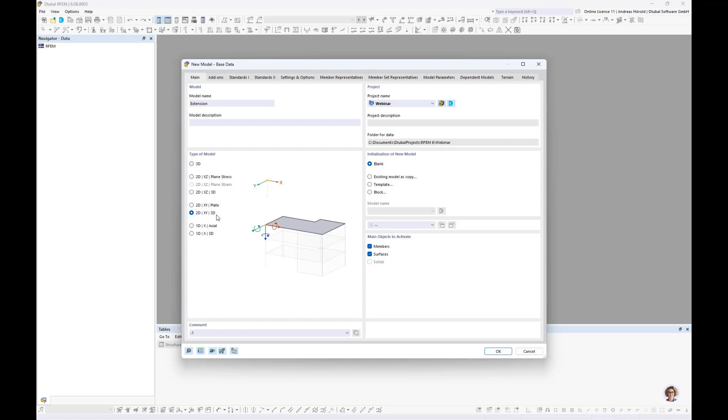So I start with a new model, right above, new model. We start with the first dialog. It's a similar dialog as in RFEM 5, but the user interface is very modern. I start with a model name. I call it extension. A new small feature: you can select a type of model, for example 2D XY, 3D. This allows you to put three-dimensional loads on the model, and the results can be 3D internal forces. Also for the 1D, that's this selection here. Okay, then we turn to the next dialog, the add-ons.

That's the next difference to RFEM 5. The add-ons are now directly integrated into the main programs. This allows the individual parts of the program to interact with each other. For example, with the building model, you can determine the floor masses for the dynamic analysis. Another example, you can do a 3D calculation with the building model and then design, for example, a concrete slab as 2D model, or timber slab, etc.

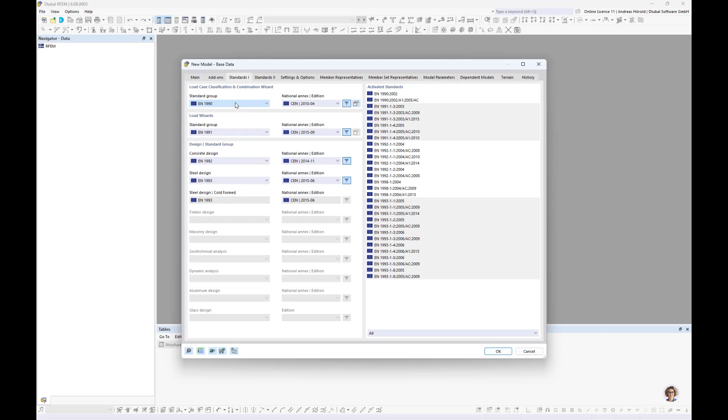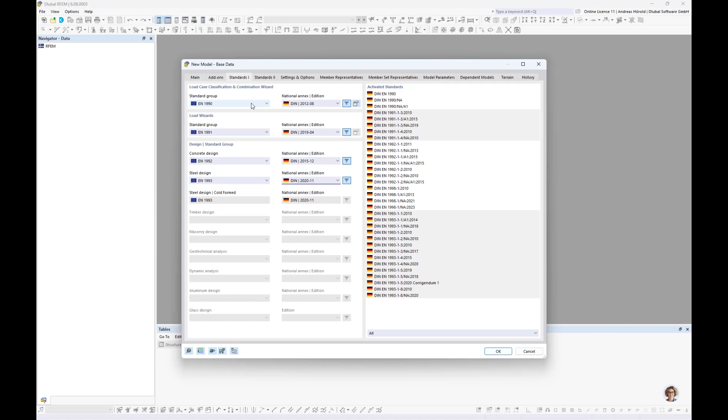Then the standards: as also in RFEM 5, you have a lot of international standards. We use the Eurocode and, in our case, the German National Annex for our example. We would like to use the combination wizard and also the load wizards. We selected that here above.

So then settings and options. That's also a quite new feature, the member representatives and the member set representatives. For members and member sets with the same properties, you can use representatives for model organization, design, and documentation. We will use that feature in our simple example for today, and you will see that it's very easy to handle, and it's also a big advantage.

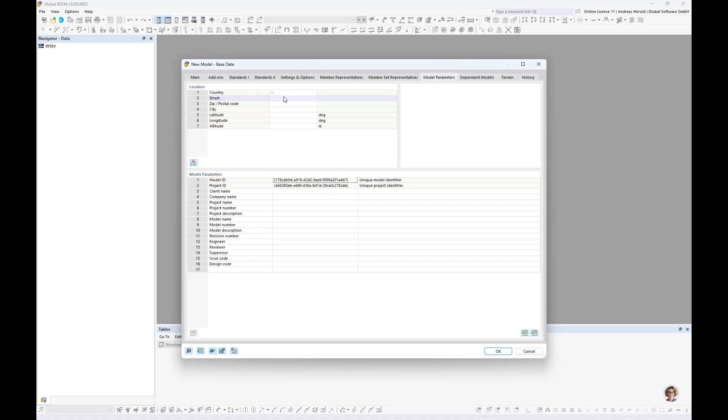So then that's the properties of the member representatives. You can change it. We will leave the settings, but it's also important to mention the model parameters. You can import the construction site for load determination. So we select a place or a location. We enter the location Leipzig, it's a subsidiary of our company.

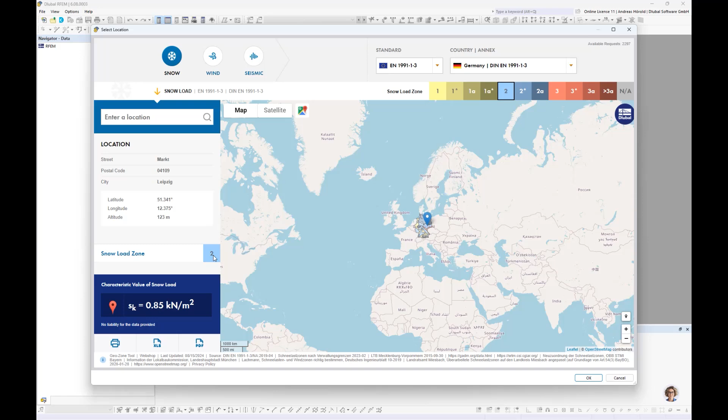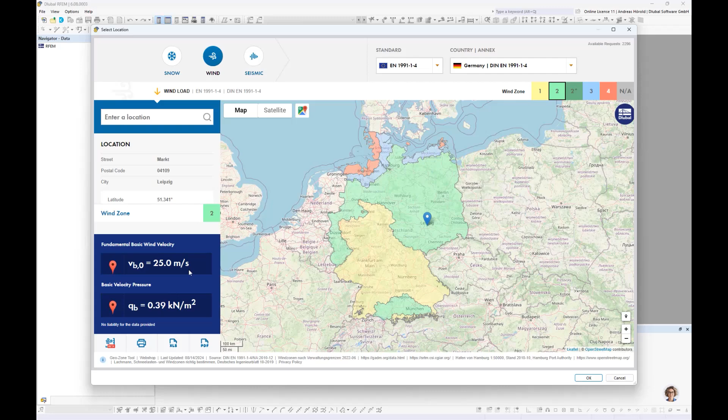So you can see the snow load zone, the wind zone, and the parameters and the values. And we can also see the seismic map, but we don't do any seismic design today. So we leave the dialog, and now the program imports all the values, and we can use the values later for the load wizards, for the snow load and for the wind load.

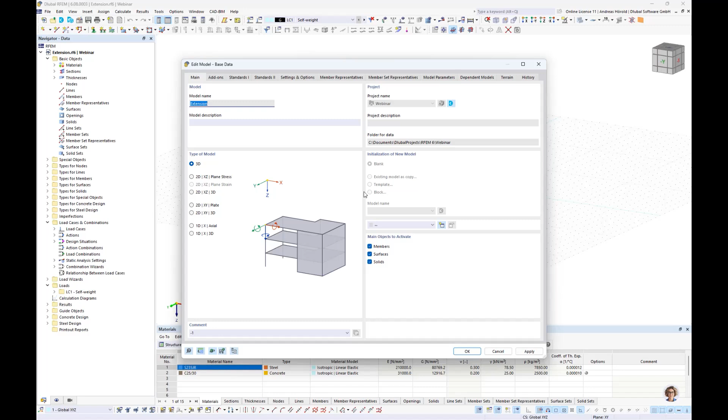So you can see that's Leipzig, the altitude, and so on. Okay, now we can leave the dialog. So that's now an empty window. And as I mentioned, with that button left above, edit model base data, you can return to the dialog anytime and select any add-on.

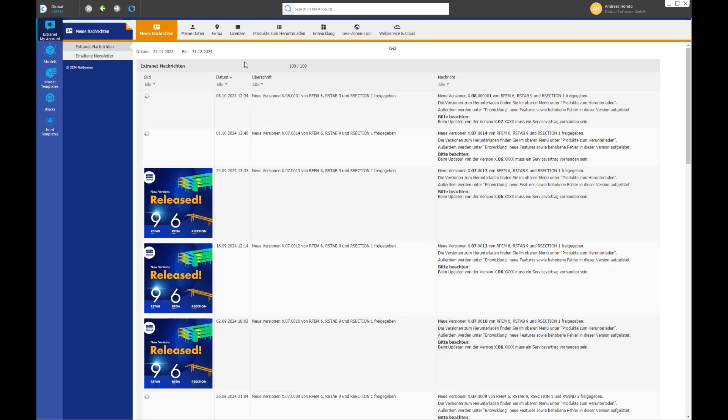So then the next difference, or what is new in RFEM 6, that's the Dlubal center left above. I click on it. You can see your folders. That's quite similar to the project manager in RFEM 5, but you can enter your Extranet account. So that's the news, for example. It's German for my account. Then you can save model templates.

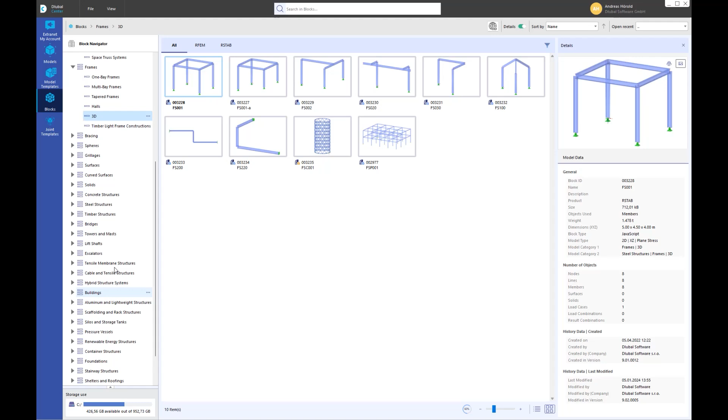The blocks are here. You can see a lot of blocks that also have parameters, not all, but a lot. And just use them. And there are also the joint templates for the add-on steel joints. Okay, we can leave the Dlubal center. Maybe just a hint, when you do, for example, a right click, that's my folder for today, the webinar folder. You can create a new project or new file and so on. So now we leave the Dlubal center.

And you can see what is similar to RFEM 5. Above the menu, on the left side, the navigator data, display, and views, and the tables are here. That's the same as in RFEM 5. There are already materials, sections, and thicknesses of the last project. I would like to delete all. With a right click on the basic objects, you can delete all basic objects. Okay. And now all is empty.

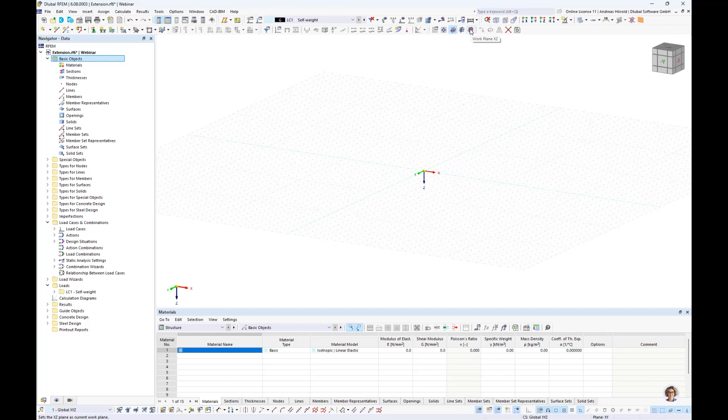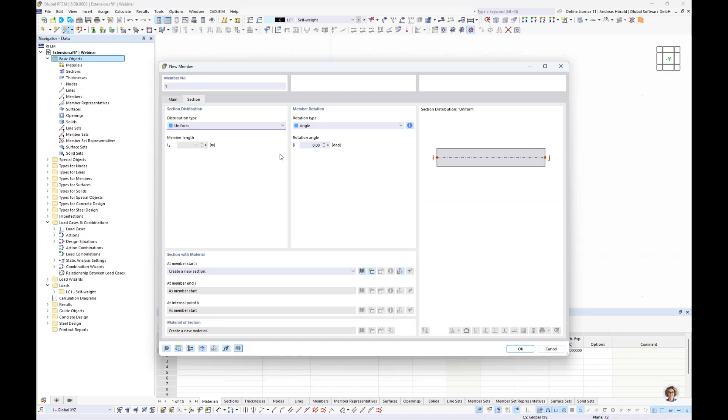So we start with the steel frame. I change the work plane to XZ above, and I view in minus Y direction. So then left above, we start with a new single member, the column. It should be a beam member type, and there are also other member types available as usual. So then section, I create a new section. You have got a large database, similar to RFEM 5. We have a lot more cross sections in our library.

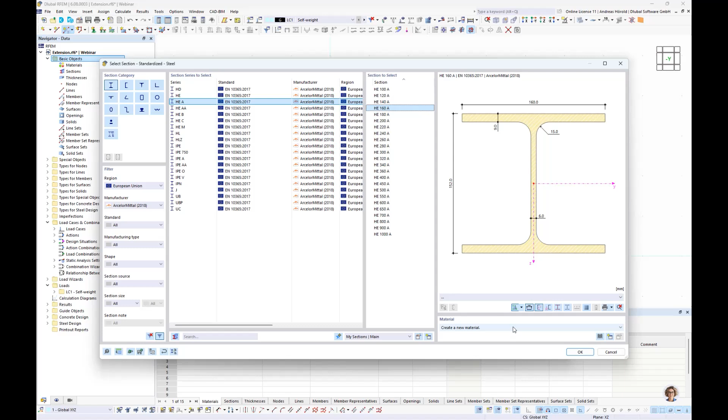So then, I use European Union and ArcelorMittal and an HEA 160, and I can create a new material also in this dialog. So then region, also European Union, material type steel, carbon steel. You can see a lot of steels, and I use steel S235JR. Okay, so we can leave the dialogs and enter the column. It should be 3 meters high.

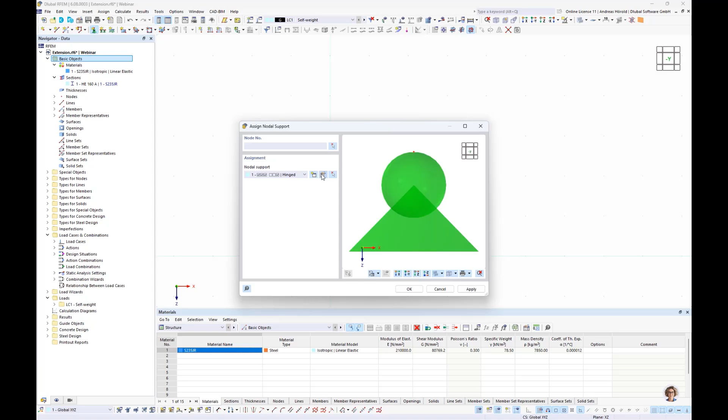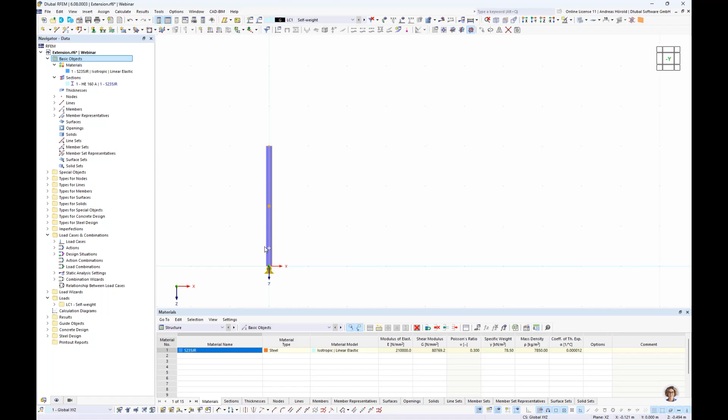Then I create a support, left above, nodal support. Now a hinged nodal support. Maybe I change the settings. No, that's quite good. We have got a hinged support. Okay. So now I copy that column 2 times. I select all, and then when I press the control key, you can see a plus. And that means that I will copy that column. So 5 meters and again 5 meters. Okay.

And when you press the shift key, you can see a minus. Then you will only move the object. So then you can see the green points, and that's the member representative number 1. And it contains all the 3 similar columns. And later we will design only 1 member representative. And then you will see the advantages.

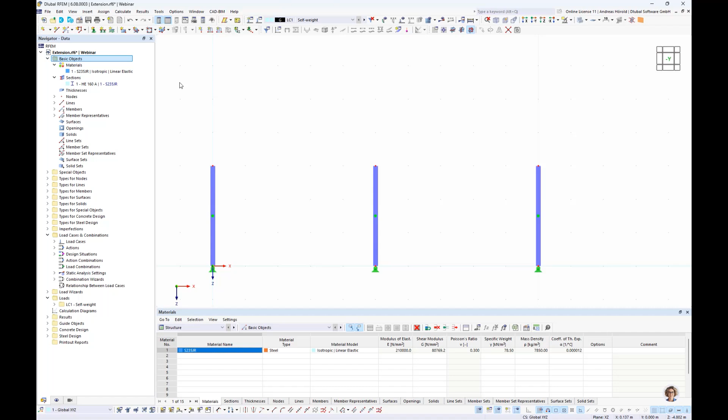So the horizontal beam is missing, left above, new single member. We use another section. We go in the library. It's a similar workflow as in RFEM 5. That's why I can go a little bit faster through the dialogs. Okay.

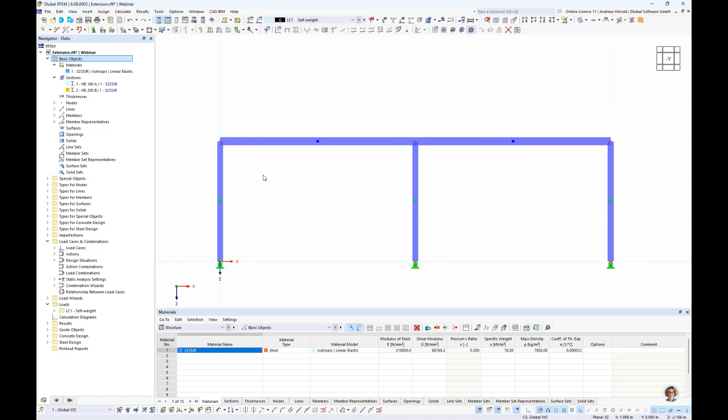So now you can see also here blue points. That's the member representative number 2, and it contains both horizontal beams. Okay, the steel construction is finished, and now we would like to model the concrete slab. We would like to enter it here in that area.

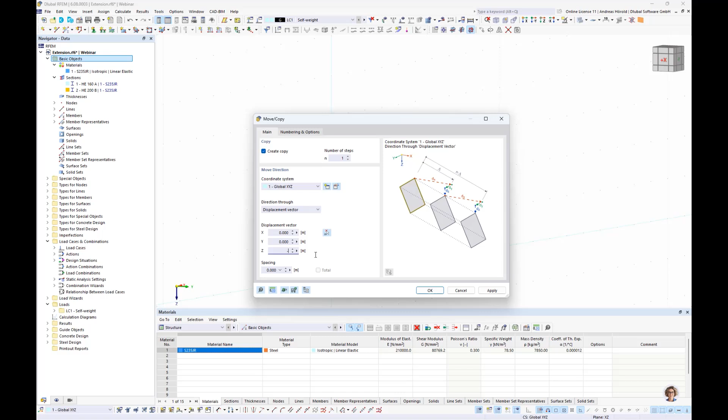You could enter it at the same height as the column height is, with an eccentricity, and use line releases or line hinges. That's still possible, but I would like to use a new feature, and that's also very good. That's the rigid link. So I copy that node right above, move, copy selected objects. I create a copy, minus 200 millimeters.

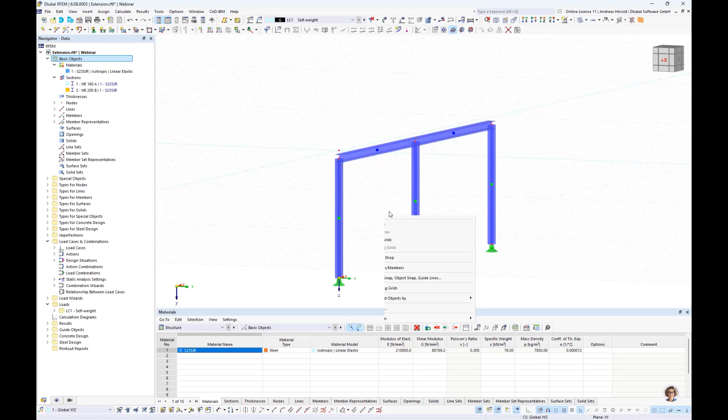Okay. Then I change the work plane above XY, and I set a new grid and work plane origin. So in that point, and you can see that's now my work plane. Okay, I view in Z direction, and now I enter left above the concrete slab. Stiffness type, standard, and I have to create a new thickness. The thickness should be 200.

We can easily calculate. The horizontal beam is 200 high, and the slab or the plate is 200 high. That's why I copied the node 200 millimeters. So we have to create a new material. European Union, concrete, and I use a concrete C25/30. Okay. So from this point to this point.

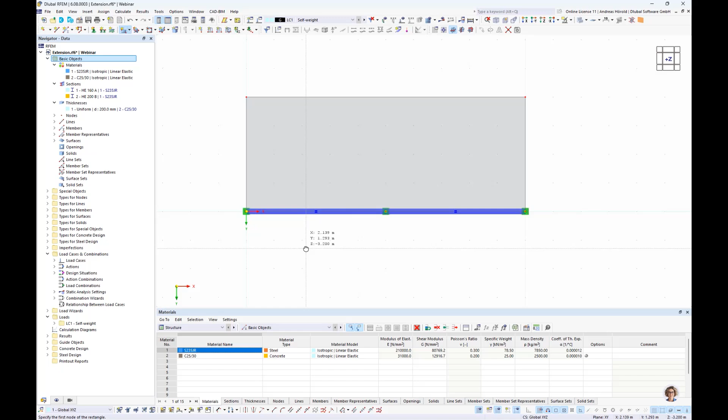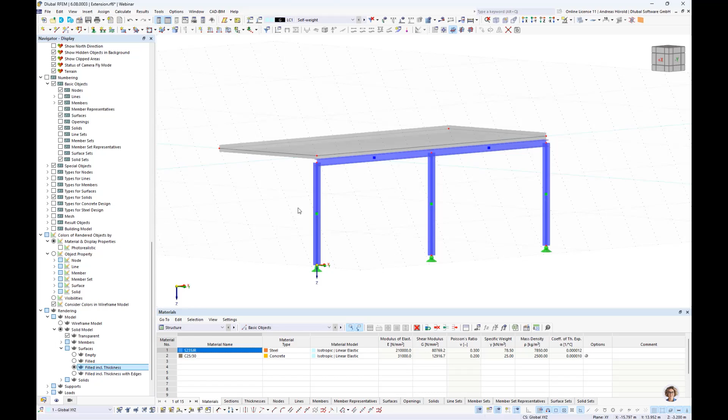And now the concrete slab is in the same position as it is in reality. We can go to the left at the bottom, navigator display. Oh, sorry. And then to rendering, model, solid model, surfaces and filled including thickness. And you can see it's at the right height.

But as we work with axes, we need to connect the plate with the horizontal beam. So we will use a rigid link. Special objects here in the navigator data. You can see also, for example, the line releases. We will use the rigid link with a right click. New rigid link. We have to select the two lines that we would like to connect.

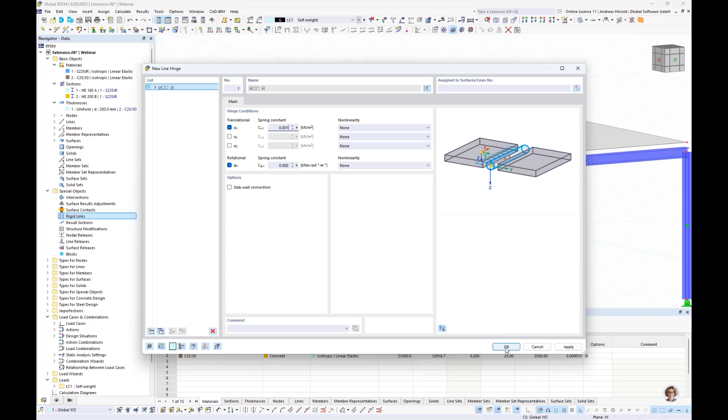And we would like to define a line hinge. We don't want to use a rigid connection, but a hinged connection. So rotational should be free around the x-axis, and in the x direction it should be also free. So we enter only a small spring so that the calculation is running. So okay.

That's the first rigid link, and we have to create another rigid link. I can do that also over the menu, insert, special objects, rigid links, and dialog box. And we come to the same dialog. This line should be connected with the middle line or the axis line of the horizontal beam. And we use the same line hinge. Okay.

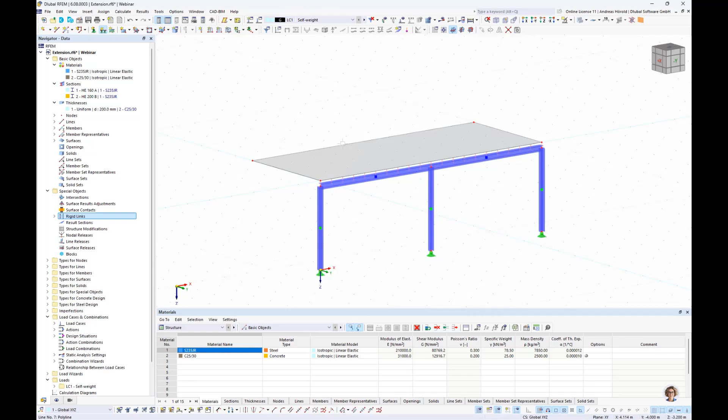So then we need to enter a line hinge left above, line support, sorry. It should be hinged. It's okay. And now we can calculate the model the first time. So now it calculates, that's good.

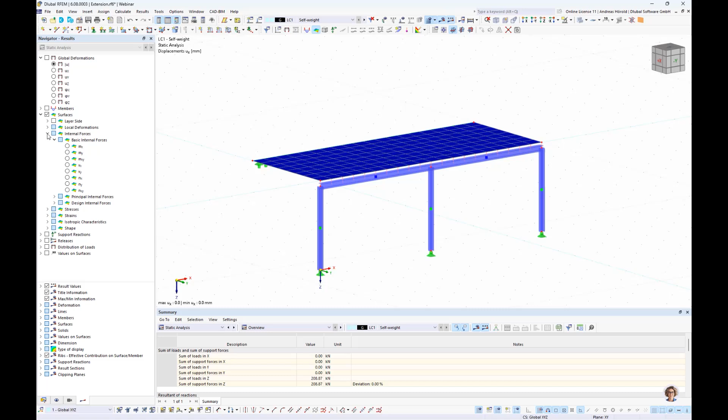And you can see in the surface internal forces my, I move the control panel to the screen. That is a hinged connection. Also here it's clear, and also here. Okay, so then we turn to the next new feature.

Imagine we would like to have a glass facade here on this side and on this side, and we don't want to model these facade surfaces. For this example, you can use the load transfer surface type. A surface with the load transfer stiffness type has no structural effect. That's really important, and you can use it to consider the loads from surfaces that have not been modeled. For example, as I said, facade structures, glass surfaces, trapezoidal roof sections, and so on.

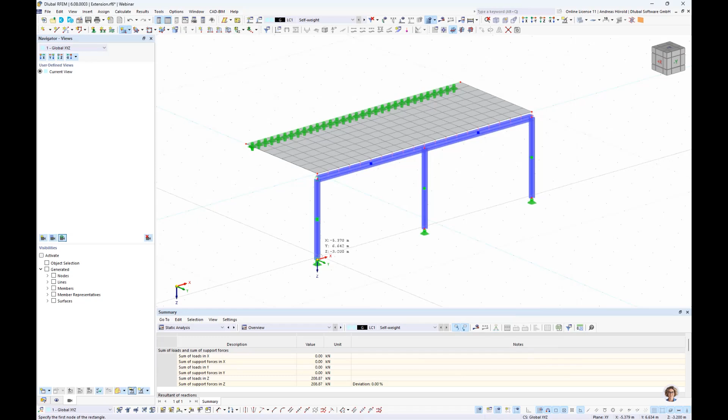So let's do that. Left above, we create a new rectangular surface, stiffness type, load transfer. So on this side, sorry, and on this side. We would like to define that the load is distributed in y direction, from the top to the bottom. That's why I select all the surfaces,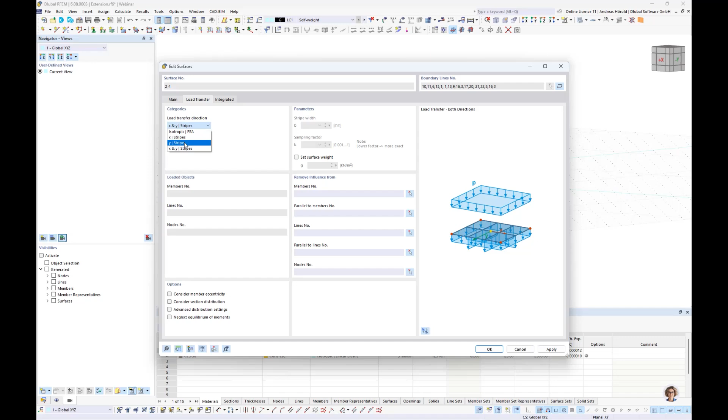double click, load transfer, and I go to this dialog, and I define here y stripe. You can also use this function, then it will be distributed in both directions. You can see that in the preview window, but we will use the y stripe. Okay.

Then we enter also line supports. Left above, line support, hinged. So here and here. Okay, now the simple model is defined, and we turn to the loads. The self-weight load case is already created automatically. I create a new surface load here above.

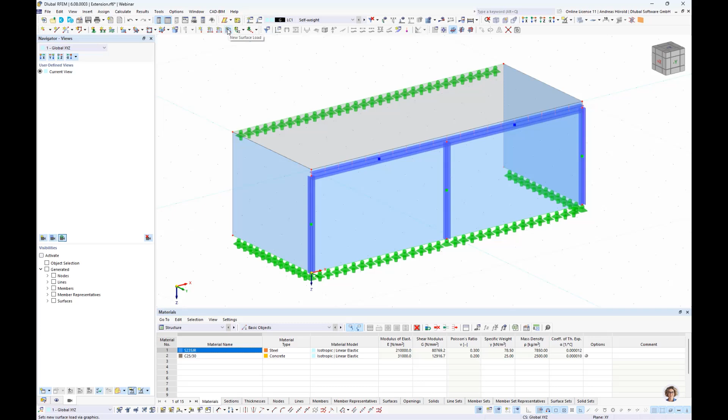You have got a lot of load types. That's not so new, that's why I go quickly through this dialog. So, okay, that's only the roof structure. And now we enter the snow load. We can do that with create a new load case, but I will do that over the load wizard.

Insert load wizards. You can see the different load wizards. For example, member loads from area load wizards. The import support reactions load wizard, where you can transfer loads from different models, from different model files. That's also a good feature. Then the snow load wizard that we will use now, the wind load wizard, and the moving load wizard.

And in RFEM 5 there was an add-on, RF-MOVE Surfaces, and this add-on is now included for free directly in RFEM as load wizard. And you don't have to buy such an add-on. So snow load wizard, similar workflow as in RFEM 5. Flat, monopitch roof or duopitch roof, and you have to select the corner nodes.

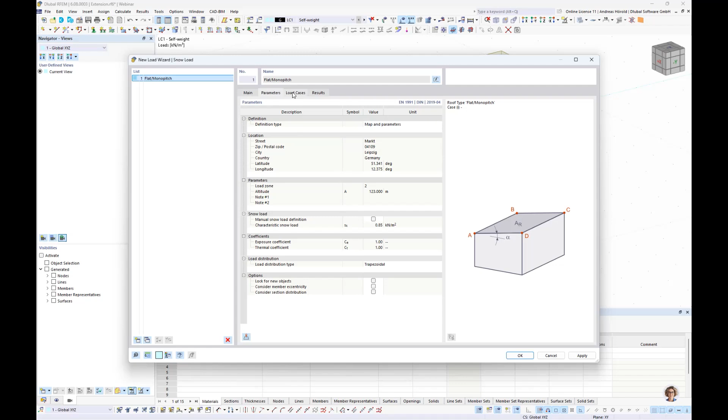So then load cases, one load case needs to be created, and we can do that with that button at the bottom, generate load cases. And I will call it snow. Now we turn to the dialog load cases and combinations. We will turn back to this dialog later. Now we only rename the load case to snow. Okay. So that's all. And now the snow load is created.

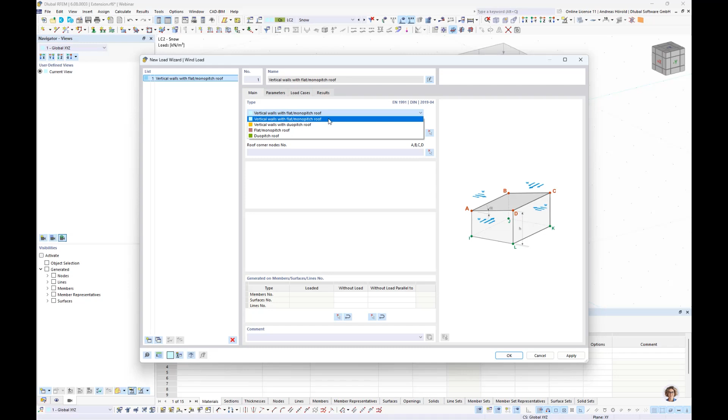So the same workflow for the wind. Insert load wizards, wind load wizards. The load wizards were in RFEM 5 in the tools menu, and now here under insert load wizards. So then these types of walls and roofs are possible. I use vertical walls with flat roof. Base corner nodes, these 4 nodes here. Okay. And the roof corner nodes.

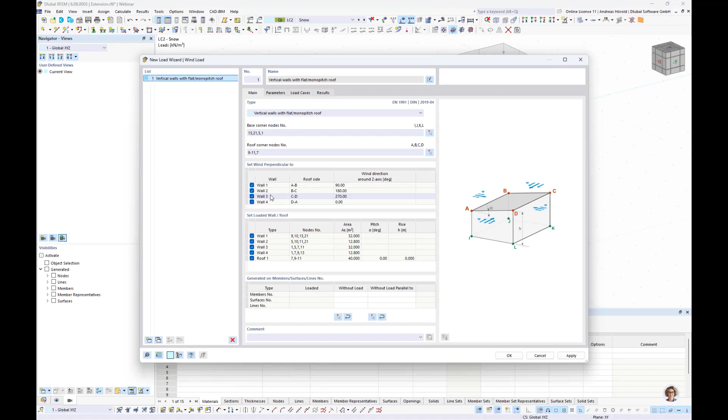So we would like to create a wind only in plus x direction, in this direction. For this example, I think it's enough. So, and that's wall 4, AD, DA. And this wall is where the building already exists, and that's our extension. You can also exclude members or surfaces or lines from the load as in RFEM 5.

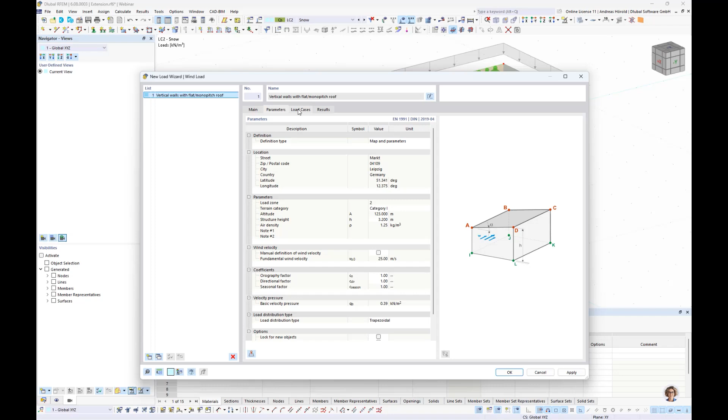And what's also new here in RFEM 6 is that the load parameters are taken over from the website. So load cases, we need these 2 load cases. We create them with that button. Okay. So now that's all. And now the 2 load cases are created, one with roof pressure and one with roof suction.

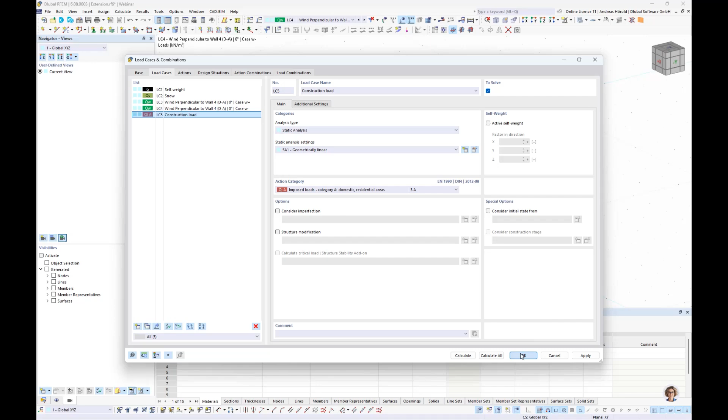So one load case we have to create now, the construction load. I use the action category imposed loads and call it construction load. Okay. And it should be 1 kilonewton per square meter. Okay, all loads and load cases are created.

Now we have to enter the imperfections on the steel columns, and the imperfections are no load cases anymore. They are organized in imperfection cases, and the cases allow you to describe an imperfection from local imperfections, equivalent loads, initial sway via table, and so on. And what is important, you can combine all of these types, and that's quite new. But the workflow is similar as in RFEM 5.

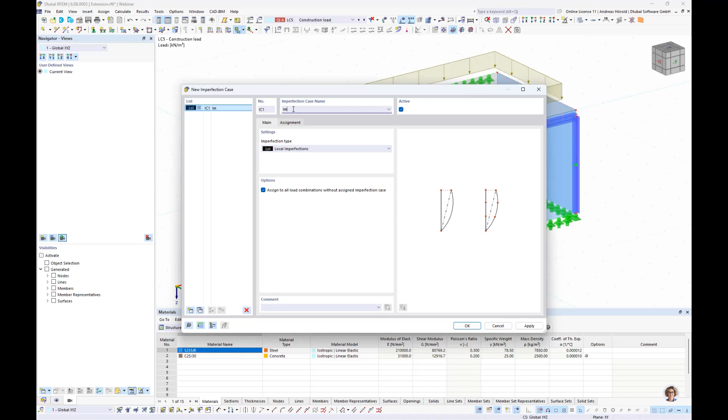So above, I select new member imperfection. At first, we create the imperfection case, imp plus x. Okay. And now I create a member imperfection. We use an initial sway, and the definition type should be Eurocode 3. Okay. In direction of the strong axis of the cross section.

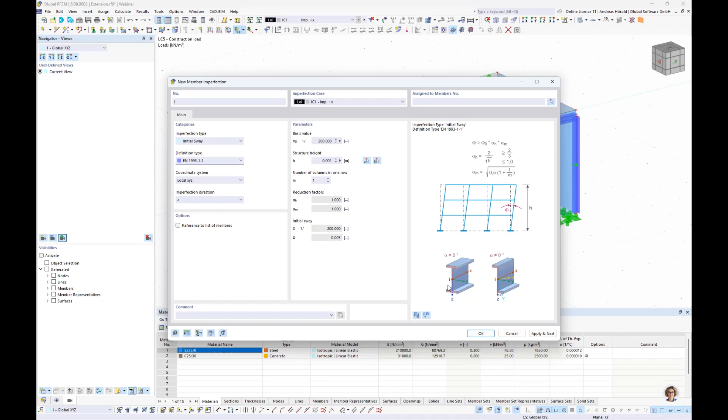Then the structure height, we can measure it. These are the 3 meters. Okay, and we have 3 columns in 1 row. And we assign that imperfection to all 3 columns. Okay, and you can display that with that button here above, show imperfection.

So now we turn to the dialog load cases and combinations. I turn to the navigator data, left at the bottom, and I search for load cases and combinations. Do a right click. Okay. So that's what we selected in the base data, the standard and the national annex. But you can change that also here if it is necessary. We use the combination wizard.

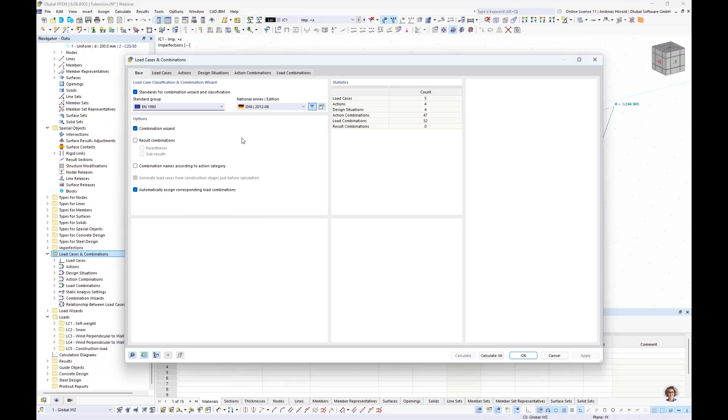The result combinations are now only for dynamic calculations. Now we use design situations instead of the result combinations. For example, you can define a design situation for the design of different materials. The design situations are created. The name is similar to the result combinations in RFEM 5, the ultimate limit state design, and now we have got 3 for the serviceability limit state.

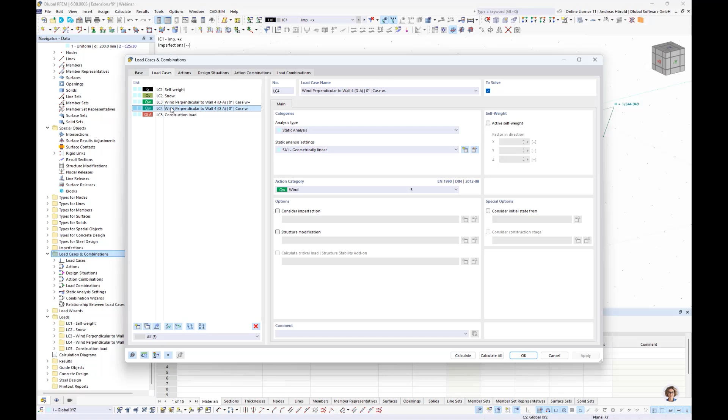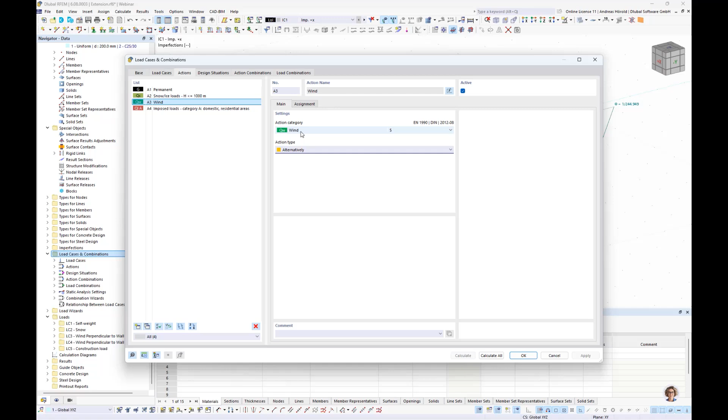So let's turn back to the load cases dialog, where our load cases are. The wind, for example, 2 wind load cases and the construction load. Then actions, and it's important to mention wind: you can define the action type simultaneously, alternatively, and differently. And it's clear that the wind load cases should act alternatively. So, design situations.

So let's take a look at the combination wizard. It's the P-delta static analysis setting, and you can see consider imperfection cases is selected automatically. As in RFEM 5, we have a lot of features. For example, you can reduce the number of generated combinations. You can use user-defined action combinations, favorable permanent actions, and so on. Okay, I can leave the dialog.

We select all 3 serviceability design situations, and for them I use the combination wizard geometrically linear. We will activate the concrete design and steel design for the characteristic serviceability limit state design, but for the frequent only the concrete design. And we deselect the steel design also for quasi-permanent. So you can see it's very flexible here.

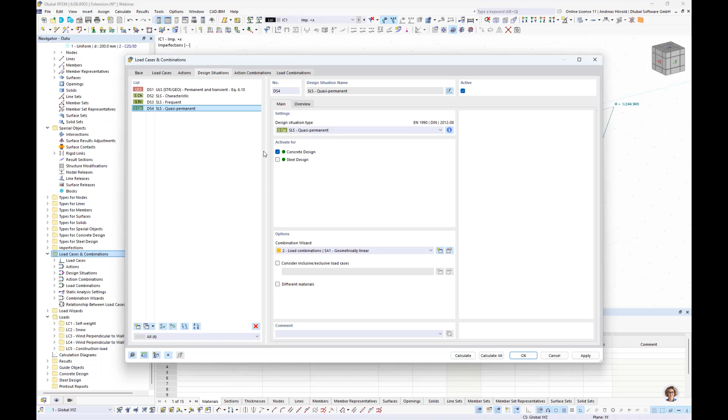So then we can create action combinations. You can see all the load combinations, 52 different load combinations. And when we turn back to the design situation, you can see in the overview what load combinations are assigned to the design situations. Okay. Now we leave the dialog.

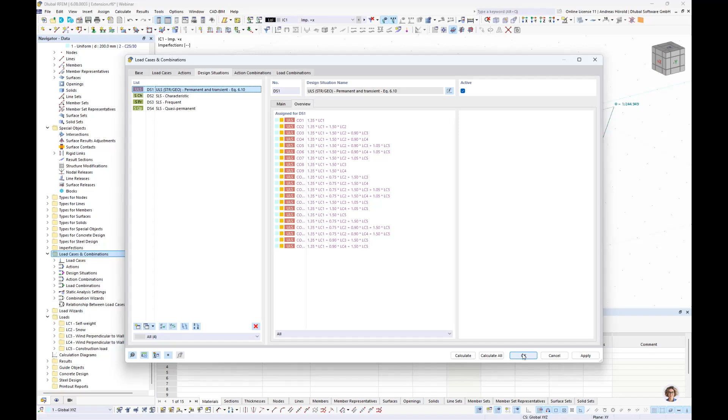And we turn to the steel design. We define the settings for the member representative for the column. We do that only one time for one column. Double click on it. You can see the design types, and we need to create an effective length. We will define a buckling length factor 1 for that member representative. We use the second order theory. We assigned imperfections, and that's why the factor 1 is okay.

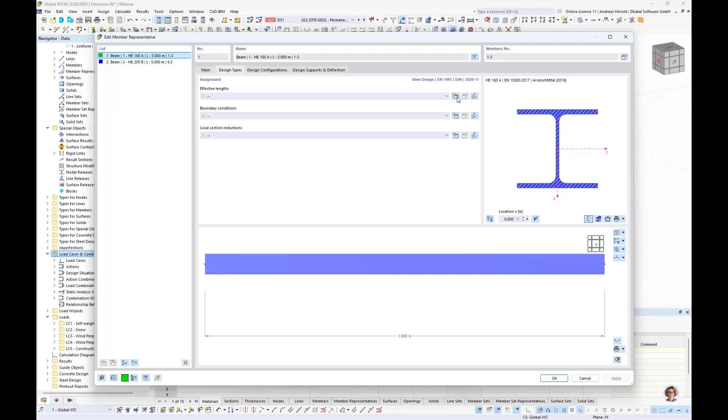We create a new effective length. Determination type: we consider for all designs the flexural buckling design, the torsional buckling, and the lateral torsional buckling. In this dialog, we define the fork support on both ends, and as I already mentioned, we define the effective length factor 1. That's sufficient for the design. So, okay.

And I can display all the settings in the navigator display. Top left, I change to the navigator display. Scroll up, and then types for steel design. I can select the member effective length, and you can see the buckling factors, the supports, and so on. And you can see all is created for all columns. When you imagine you have not only 3 columns but 100 equal columns, you only need to define the settings one time. And that's a big advantage of RFEM 6.

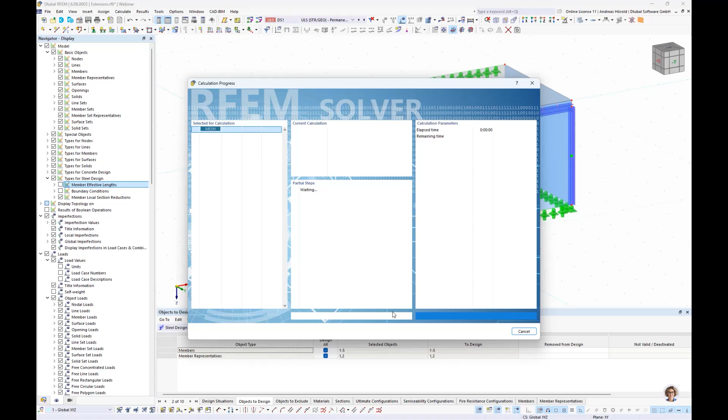Let's run the steel design. Now you can see what we already defined, the design situations, objects to design. We leave the settings. I run the calculation. And it's also a new feature in RFEM 6: the calculation is much faster. Several solvers, one per core, are initiated in parallel, each of which calculates load combinations. This ensures a better utilization of the cores and thus faster calculations.

You can see this warning message: no effective lengths for the horizontal beam are assigned, and that's why no stability design was performed. And the same for the member representatives. So let's go to the design ratios on members, and we select design ratio by sections. Those are the columns, and that's the horizontal beam. You can see only a section proof was done for the horizontal beam, no stability design. But for the columns, there's a stability design.

When I select one line and double click, or go to this button, design check details, you turn to a dialog with the design check details. That's a quite new feature in RFEM 6, often wished for by customers. The program clearly displays the design check formulas in your design, including the reference to the used equation from the standard. It's no black box anymore. You can see all the formulas for each design, and you can also send them to the printout report.

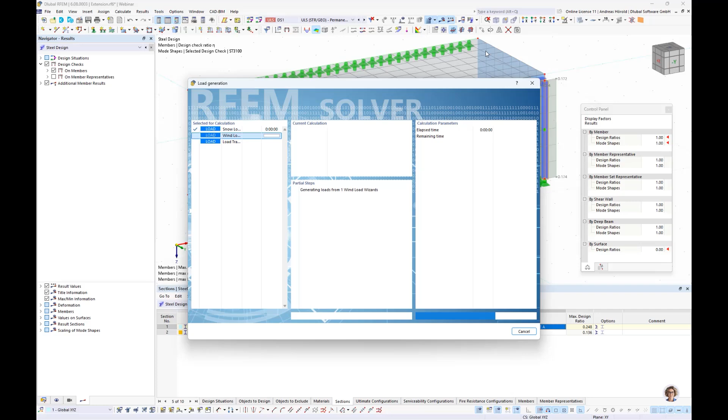So we optimize in the current row, and run the steel design again. Only the steel design was done now, and we go directly to the input data and sections, and you can see the maximum design ratio.

But the program has done only a new calculation or new design, steel design, but it doesn't calculate the internal forces. We have to do that in a second step, because we need to consider the different stiffnesses of the system. That's why we run the calculation again.

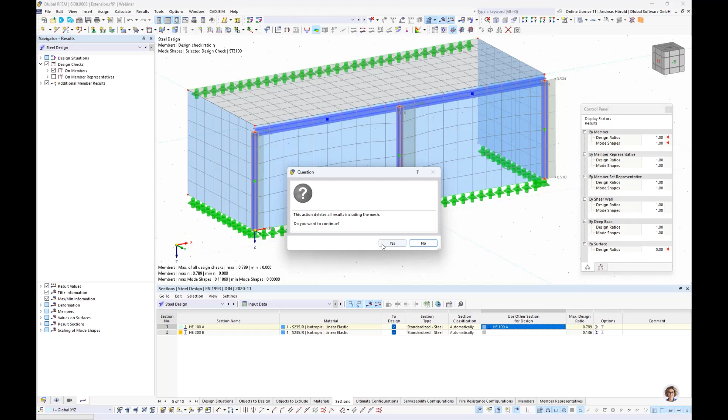It's now an HEA 100, and we use the optimized section in the model. We run the calculation again, and now also the internal forces will be calculated, or recalculated.

So that should take only some seconds because of the fast solver. Now go directly to the input data and the sections. Yeah, and you can see the updated maximum design ratio.

Design ratios, members. I can see the stability, bending, and buckling about principal axes. That's the highest design check ratio.

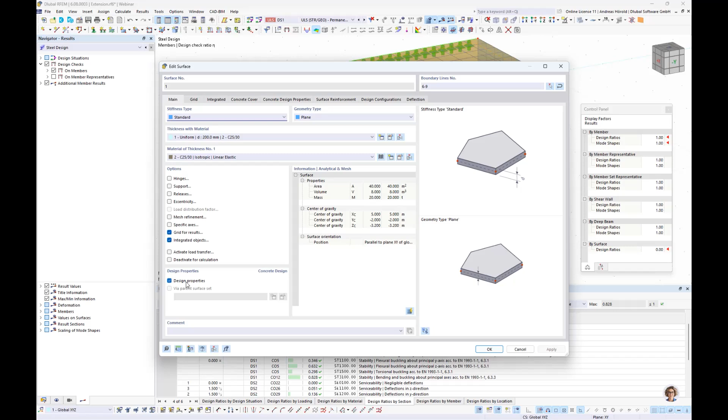Okay, now we turn to the concrete design. I do a double click on surface number 1 and go directly to the design properties. Yeah, they are already selected here. When you don't want to design the slab, you can uncheck that. But we would like to design the concrete slab.

Surface reinforcement, we create a new surface reinforcement. We have to define the material, so we go quickly to the library. Reinforcing steel, I use B500M.

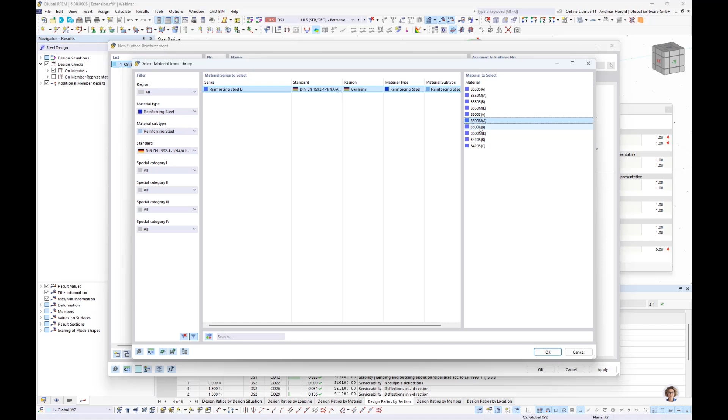We would like to use a mesh, not rebars or stirrups. Then a Q mesh—well, also R meshes are available—Q mesh 424. Okay, so that's all.

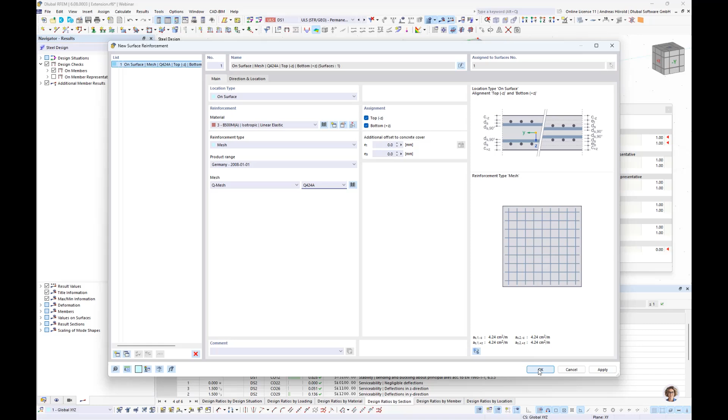We can leave the dialog. Those are the design configurations. We'll leave the standard settings, but you can change the settings in case it's necessary.

Also, punching is possible directly in the add-on. Concrete design, you don't need an additional add-on for that, as it was in RFEM 5.

So then, for deflection, we only change the reference length by minimum boundary line. Okay.

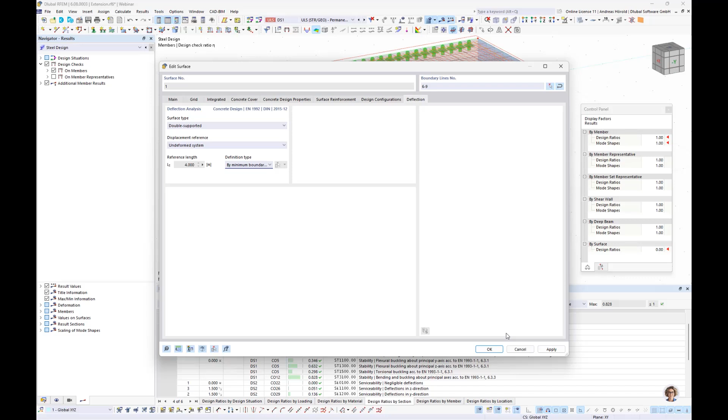So now we calculate, or we would like to run the concrete design. Only the load combinations that we don't calculate for the steel design are calculated, then the concrete design.

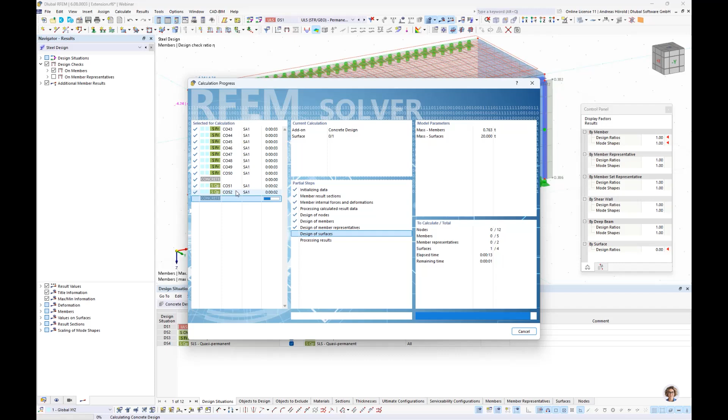So design ratio and surfaces. Yeah, there are for sure some singularities. We ignore that in this case.

We can also press the button that says you don't consider the construction rules. Yeah, this is RFEM. But if you want to smooth them, you can do that also in RFEM 6 by using the surface results adjustments—same workflow, or similar workflow, as in RFEM 5.

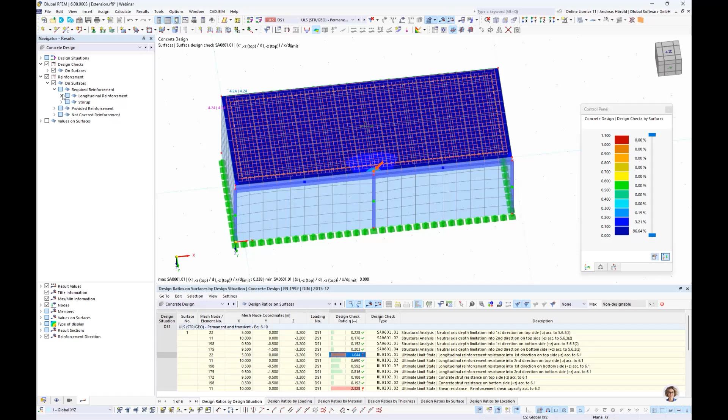So let's go to the results. Reinforcement on surfaces, required reinforcement on the top and the bottom. Let's take a look in Z direction. Yeah, and we would like to print that graphic in the printout report.

But before I do that, I'll show you another important feature of RFEM 6. You can see that here: calculate in cloud.

For larger models, you can use the cloud. You can outsource the calculation to a computing server in the cloud. There are different servers available, powerful servers. You can clearly arrange the calculations in the extranet.

Here, calculation task, my and company. You need to buy credits previously for the cloud calculation. And you have virtually unlimited computing capacity using this cloud technology.

You don't use your own solver—you send it only to the cloud, and you can work on your own computer in the meantime. Okay, that's all for the cloud calculation. Just try it for larger models.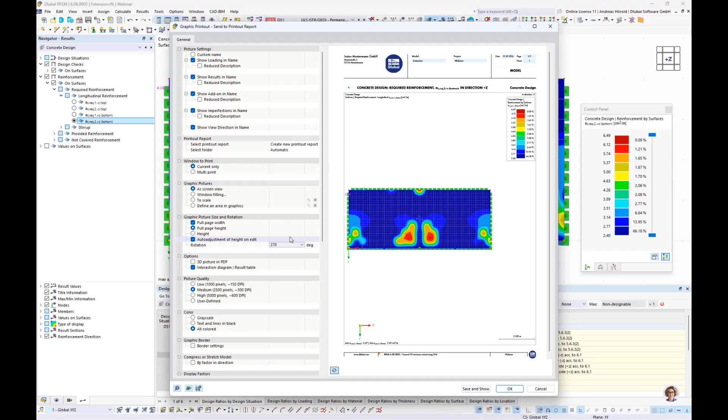Because I would like to show you the printout report, we can rotate that, for example, 270 degrees, and we can say window filling here. I've got different options for the display. You can also move the color scale outside the graphic picture.

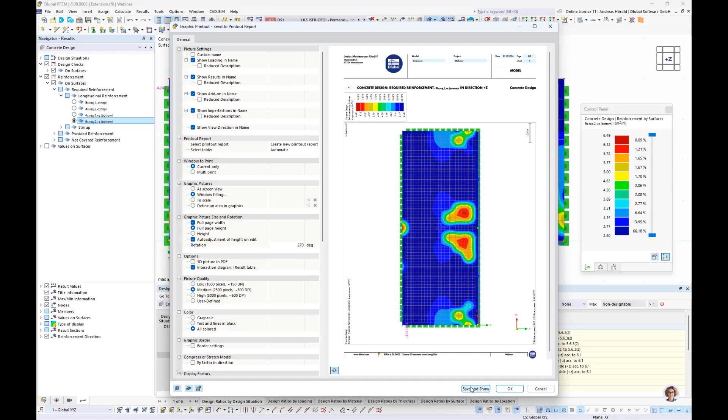And what's also available is the multi-print. It's similar to RFEM5, but also possible in RFEM6. So we can press save and show. I leave all the selections. You can also print parts lists of the steel, the concrete, and all other materials. So we press OK.

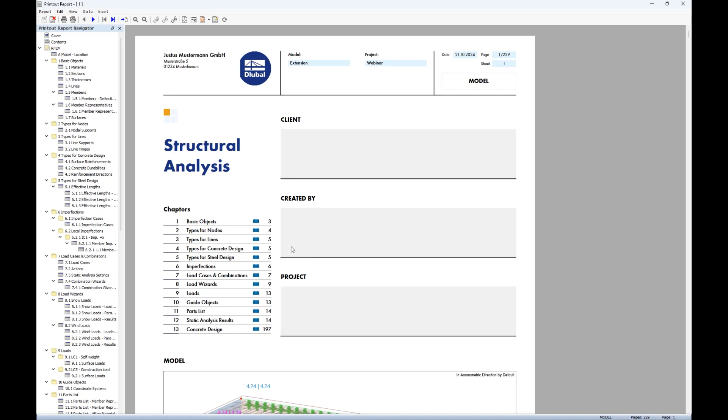So now the printout report will be calculated. What's quite new in RFEM6 is that you can work in the printout report and in the program in parallel. That's very easy to handle.

You can move the printout report to your second window and work in the program, print more graphics in parallel, and you can see that on the other screen in the printout report. A very good feature.

So you can automatically print an overview of the model. Left above in the report, you can export to PDF or HTML. You can translate the program as in RFEM5. You can insert PDFs, formulas, 3D graphics, plain text, and so on.

So now you can see we have got 229 pages, and they were created in a short time. The protocol is much faster, much more modern, and so on.

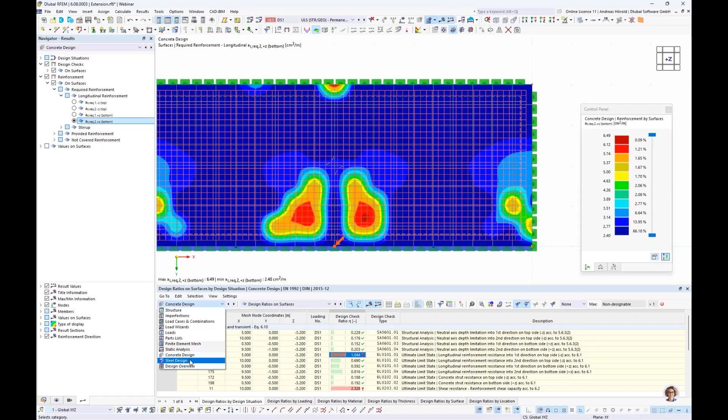So we leave the protocol open. I turn back to the program. I would like to print formulas in the printout report, now the design with the highest ratio. So I print the formulas in the printout report. Okay.

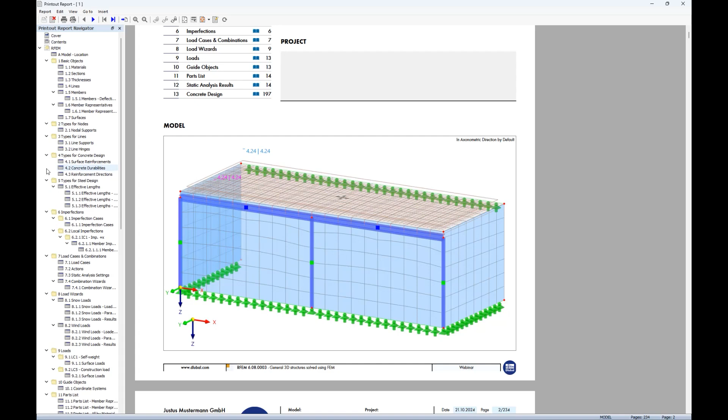So I can go to the printout report, and we can see at the end of the steel design results where this design is, with the formulas.

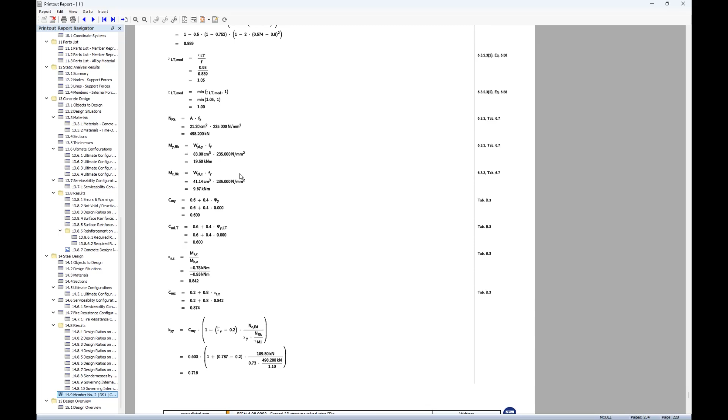Then I would like to show you the last feature, in my eyes also a very good one. I go back to RFEM. Imagine we have to modify the horizontal beam because of the glass facade. I go to the section. Imagine we have to cut a bit from the flange here. How to do that easily?

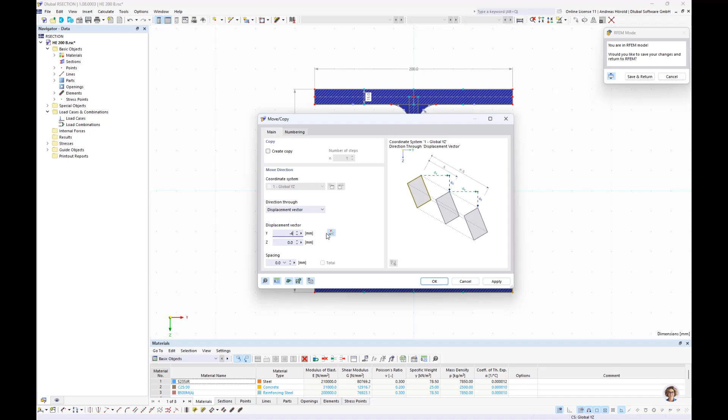With that button, I modify the section in RSECTION. The section editor will be opened. So I go to the section, left above, and explode it so that I can modify it. I move this point here, right above, in minus y direction by 40 millimeters. We cut 40 millimeters and press save and return.

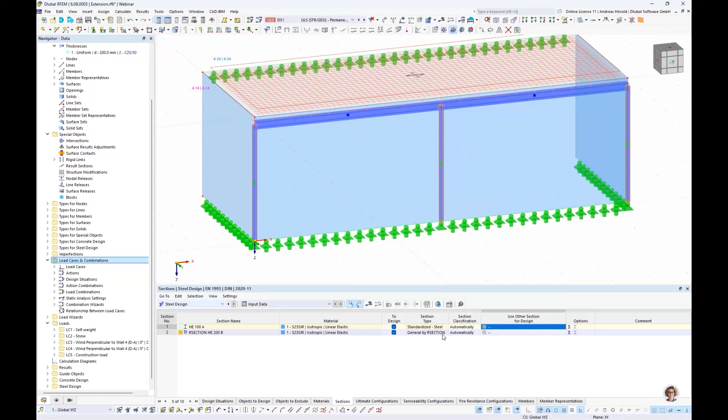And we turn back to RFEM, and the section was updated in a short time. Okay, so now we have to run the calculation again.

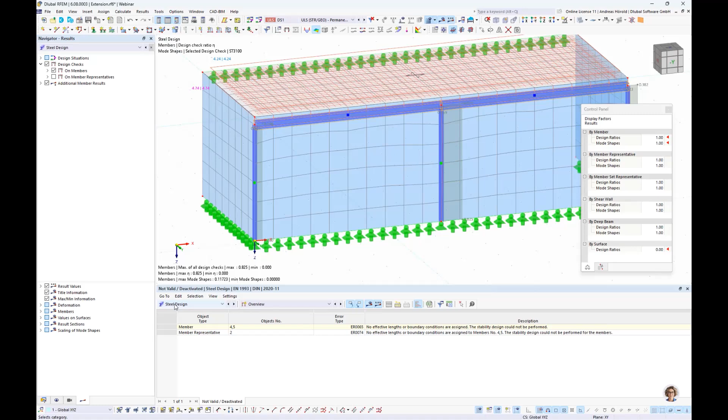We need to run the calculation for the concrete design as well, so everything is updated. I will do that; it should take only some seconds. In the meantime, we can go to the printout report. I wait some seconds until it's finished. So now it's finished.

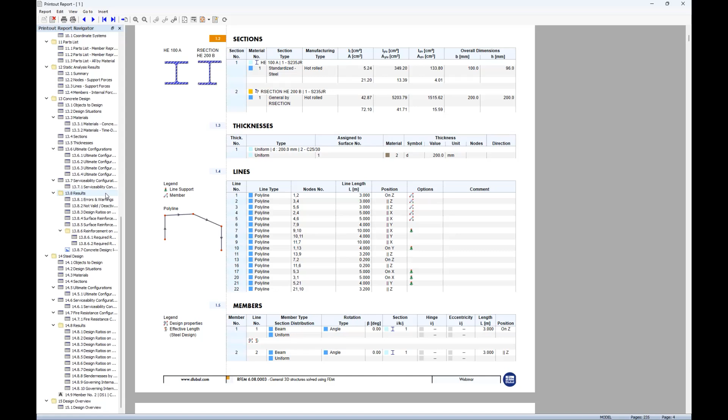We press the refresh button above, and we will see, when we go to the sections, that the updated section is considered in the printout report. Also for the steel design, you can go to the steel design sections. You can see now it's our updated cross section, and everything was updated in a short time.

Yeah, that's all for today. I hope you could see what's new and what's different in RFEM 6. We have a lot of advantages that let you work faster than in RFEM 5. Just try it on your project, maybe with the trial version. You will see the new program is better, is faster, and I believe you will love it.